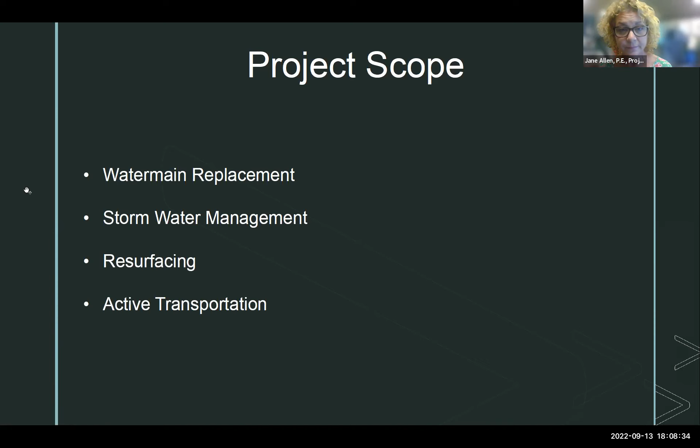So the drinking water infrastructure, the key points on why we would replace this: on Greenview, we're replacing an existing small 6-inch line, and we're giving it a new ductile iron 8-inch line. Along South 7th Street, there is a 12-inch line, but due to the cost of maintenance, past breaks, and the capacity of the interior of the pipe, we are installing a brand new 12-inch ductile iron water main on the other side of the street. We would replace water main either for their age, their size, as I explained for Greenview, the cost of maintenance. If we can maintain a system with less frequency, then it grows in value.

We also have a need for hydrant coverage. In the past, the coverage might have been over 450 feet. New regulations show that it should be under 300. So we have to put hydrants closer together to make sure our fire department has the coverage they need during a fire event. When you replace water main, you also have opportunities for other infrastructure improvements. In this case, stormwater improvements. Next slide.

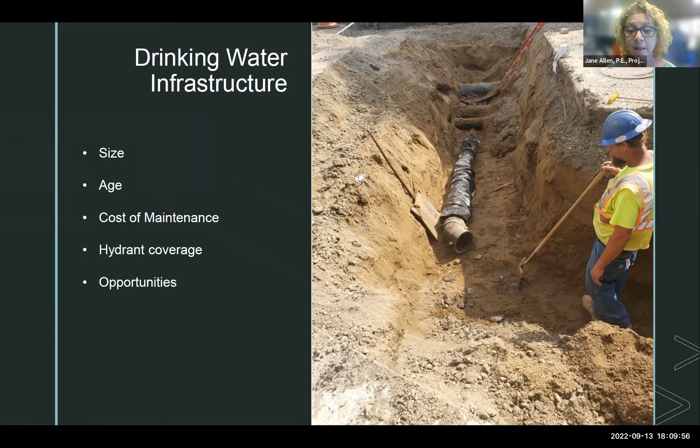So the stormwater infrastructure, the opportunities that are provided by us breaking into the road and having to resurface it anyway are some infiltration trenches. We can place them over the proposed water main and also in place of the abandoned water main, which we will actually take out since it's an existing 12-inch. So we will infiltrate on the first runoff through a sand trench. Then we will retain the water in an aggregate trench that will then discharge to the existing storm sewer when the flow in the storm system has gone down. So it holds the water that is in the roadway and it flushes the first runoff.

We can also, at the time of this project, repair any damaged structures and sewer that we come across. And we can extra capture rainwater also. We are proposing bump outs at proposed new crosswalks. The crosswalks themselves are not a point that we will change in our design. We do want to put the crosswalks at those locations. With the bump outs, not only is it safe for pedestrians and the traveling public, but it also captures rainwater that we can infiltrate into our storm system. Next slide, please.

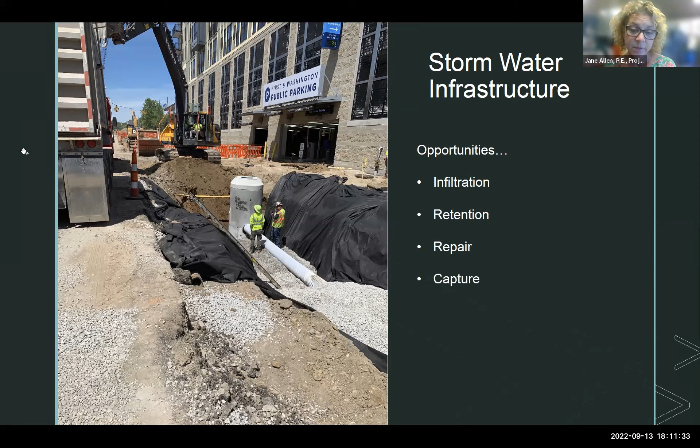The transportation infrastructure, it's how you want to move in your community, how you currently move. We've asked a few questions like that on the survey about how you use it now and how do you want to use it. The active transportation infrastructure that we provide is like for pedestrians, we use sidewalks, the crosswalks, the cross pathways, HMA pathways, the border trail, that sort of thing. And also we want to maintain our bike system.

So South 7th Street was designated an all ages and abilities route. And what you can do with that for the cyclist, Cyrus will explain in more detail. But for the transportation infrastructure, not only is it people walking to the schools or the nature areas and the parks in the area, but they're getting around the neighborhood. They're getting out to Scio Church Road. They're taking mass transit to local businesses. They're getting downtown, and eventually they can get anywhere in Ann Arbor they want to once we improve our infrastructure for active transportation. Next slide.

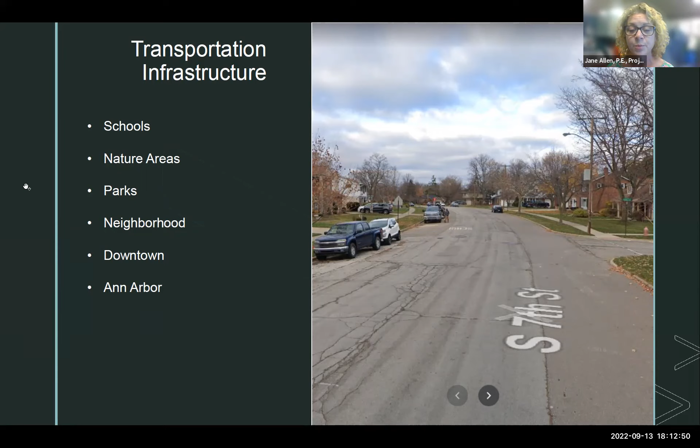As I was stating earlier, this all ages and abilities bike network, that's along South 7th. It's in our transportation plan. It affords for all different range of cyclists, whether they be children, seniors, people of color, women, people with bike sharing group, low income riders, people with disabilities, people moving goods and hardware, or even confident cyclists. It's this wide range of users that we want to have access not only to use the facilities but get to the facilities. So the next slide, Cyrus. We want it to be safe, comfortable, and equitable for all users. Next slide.

You can read more about the All Ages and Abilities Network for the bicycle network in our Ann Arbor Moving Together, which is in the Comprehensive Transportation Plan. And you can find that online. So considering that this is an All Ages and Abilities Network for the bicycle, once we put in the water main, we improve the storm drainage and we resurface the road. What's on top, not changing the location of the curbs other than possible bump outs, is the pavement markings that go down. And they can have streets looking many different ways. So Cyrus is going to go through what you have now and different possibilities of what could be.

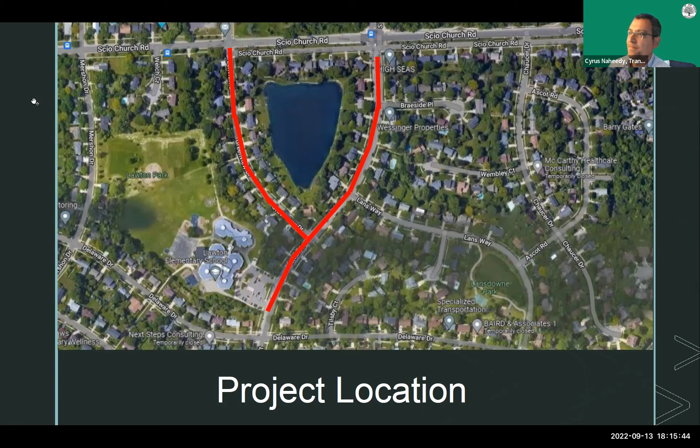So just as a baseline, we put together a cross section of what South 7th looks like right now. So going from left to right across the screen, you have sidewalk, parking lane, and then a southbound travel lane. You can see there's bicyclists and cars together, just meaning that it's mixed. There's no pavement markings to indicate any sort of separation. And then the same thing on the opposite side, a northbound travel lane that's shared, unmarked, and then a curbside parking lane and sidewalk. As has been noted in other project materials, especially the survey, South 7th, especially this section, is relatively wide, which means that there's space for all of this. And the vehicle lanes are relatively wide, given the multiple uses it's serving right now.

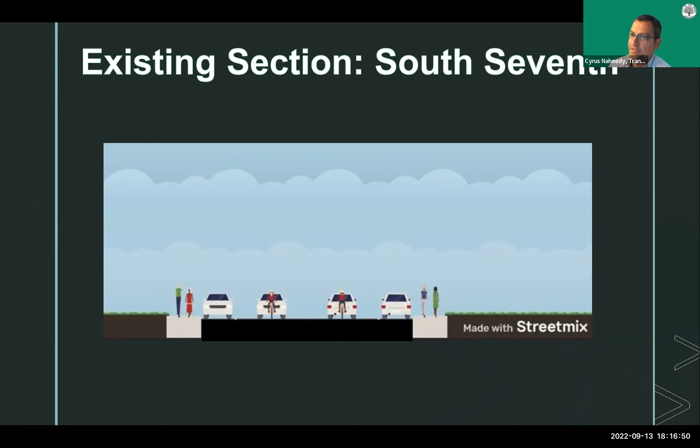So with that as the existing baseline, the first proposed idea is essentially keeping it as it is, but with pavement markings to clarify those uses. So we'd have a parking lane, and then at about 8.5 feet out, we would actually mark where that parking lane ends with these pavement markings. I'm sure you've seen them elsewhere in town. We call them parking tees. It delineates space by space where legal spaces exist, where the parking lane ends or begins.

So then the shared lane is a shared use space with motorists. You can also see the title Sharrow, because that's the terminology for the pavement marking that's on the screen. It shows a bike with arrows indicating a shared space with motorists. So that would be a 12.5-foot lane in each direction that's shared between motorists and bicyclists. And another 8.5-foot parking lane on the northbound side and sidewalk. So again, this would sort of be the baseline. This would be essentially putting things back as they currently are, just with pavement markings to clearly communicate what each part of the road is being used for.

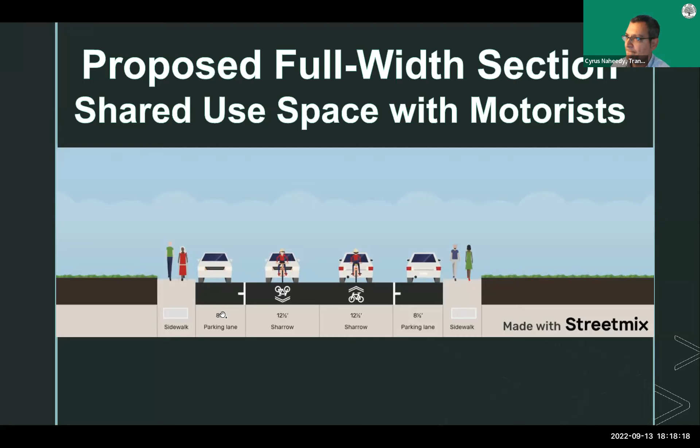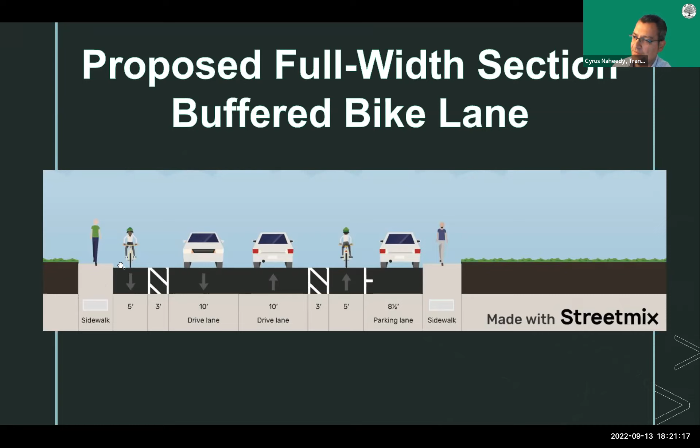So the extra space that would have been used for parking is instead used for the buffer space. And also the parking lane becomes a little bit wider like it was in the existing baseline scenario. For those who are familiar with this, we have this in areas of town. It does create more separation between the bike lanes and vehicle lanes. One thing that's probably worth noting that we haven't talked about yet, that was talked about in the survey, is the changing nature of 7th Street, even in this project area.

So according to the transportation plan, the treatments that we would put on a minor street, like South 7th is further north here and for the northern section of this project area, are a little bit different than what we would put on a local street. On a typical local street, we wouldn't do any pavement markings whatsoever. Because South 7th Street within this project area has both road classifications, part of it's a minor street and part of it's a local street, we're rounding up; at the very least, we'll put pavement markings in, even though that's not something we would typically do for a local street. So our baseline proposal is to put pavement markings in just to clarify the uses, even if it's to clarify the uses as they currently are.

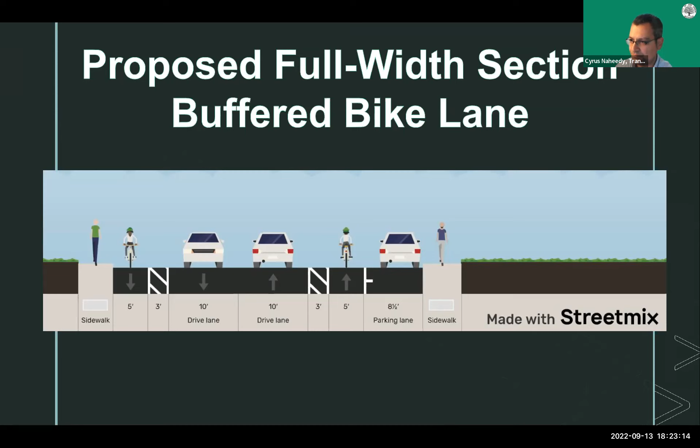I bring that up just because some of these higher levels of treatment are more typical for a minor street or a higher classification street. So a buffered street, or as mentioned in the survey, if we were to put separation in, which is pending some policy and equipment changes we would need to make within the city, those are all related to higher classification roads and higher bike facility treatments.

From a transportation perspective, it increases pedestrian visibility and reduces the crossing distance for anyone crossing. And what's important to note is that when bump outs occur at an intersection like this, while there's not parking legally allowed on this bump out, the way that we typically design our bump outs, and the way that we're designing them at most intersections for this project, it's not taking away any parking that's currently legal at the intersection.

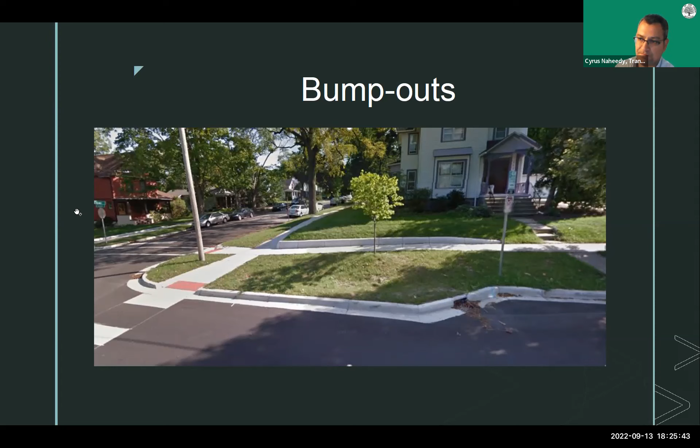Similarly, at 7th and Landsway, it's proposed as a one-sided bump out. Again, which side is not entirely set in stone. We're showing something for conceptual purposes to some extent. But it's a one-sided bump out proposed at each of those locations, which means that there's no impact to parking because, again, these bump outs are occurring at intersections. So there's no real impact to legal parking availability.

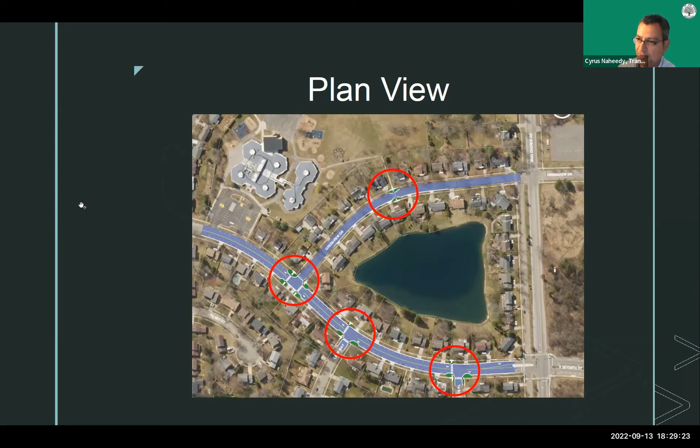So we took that detour to talk about bump outs because the cross sections we talked about for the different proposals look a little bit different at each of the bump outs. For instance, with our first proposal, which is pavement markings clarifying the existing space with shared vehicle lanes each way, at locations with a single bump out, like 7th and Landsway or 7th and Brayside, as you get close to the bump out, there wouldn't be a space for parking on one side. It'd be the wider sidewalk because of the bump out. Meanwhile, the rest of the road footprint is the same: the same width for vehicle lanes in each direction and for the opposite parking lane.

For the next proposal, if we had a single bump out in our designated bike lane scenario, again, the bump out would take one side of parking out for the extent of the bump out. And again, the actual impact on legal parking is really eliminated, because parking at the intersection isn't legally allowed.

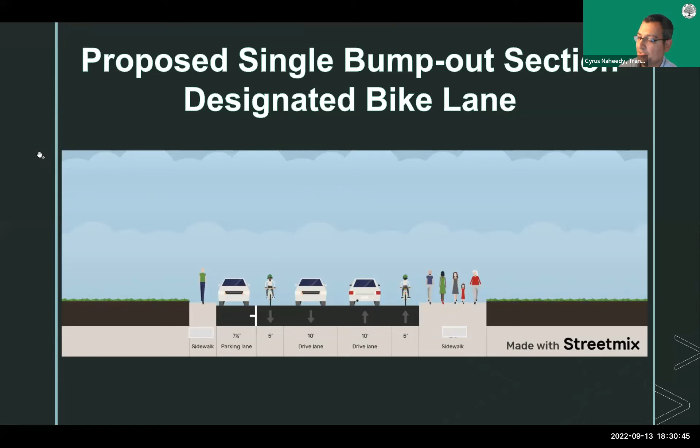And then likewise for the buffered bike lane, because the buffered bike lane scenario only had parking on one side to begin with, that one side of parking would be removed to make way for the bump out. So that means that going through the bump out, the cross section in this scenario would be no parking on either side.

So for those locations like 7th and Greenview, or really just 7th and Greenview, because the only other location where we propose 2 bump outs is along Greenview. And as we noted, none of these cross sections refer to Greenview. So at 7th and Greenview, under the baseline scenario where we have shared use space, as you might expect, it's sort of the next step up that you'd expect common sense wise. Parking was removed on one side for one bump out. Parking is removed on both sides when we have 2 bump outs. So there's space for both vehicle lanes and

shared space for bikes. One concern we've heard in other locations, and this will probably be made clear on the next slide, but there is space for vehicles to be traveling in opposite directions and for bicyclists to also be traveling in opposite directions. So I think that's going to be even clearer here, like for the designated bike lane scenario where we have a separate bike lane, even at our narrowest point where there's 2 bump outs, there's not parking available, but there is still space. The bump out is still wide enough to allow for bikes to travel in each direction and for cars to travel in each direction.

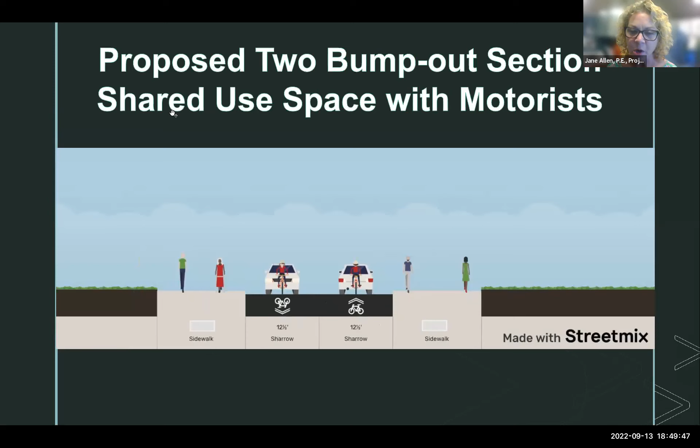So here's a question that maybe is somewhat related. How many feet do the bump outs extend into the road? Without having the plans in front of me, they would be at least as wide as a parking lane. Yeah, we don't have a slide where they're back to back, but in this very first one, if this was just using the same space, marked clearly, there's one parking space removed and all the other parts of the road are the same. So somewhere in that 7-8 feet on each side would be about how much a bump out extends into the road.

That's what all the streets downtown are, 10 feet wide. Currently, even with an 8-foot parking lane, the lanes that are left are 15 feet wide. That would cause a lot of people to speed. So when we put in the pavement markings on this particular cross section, we are narrowing the lanes. Okay.

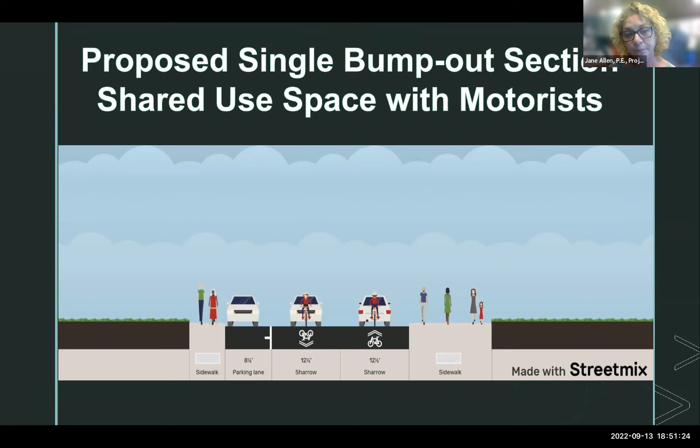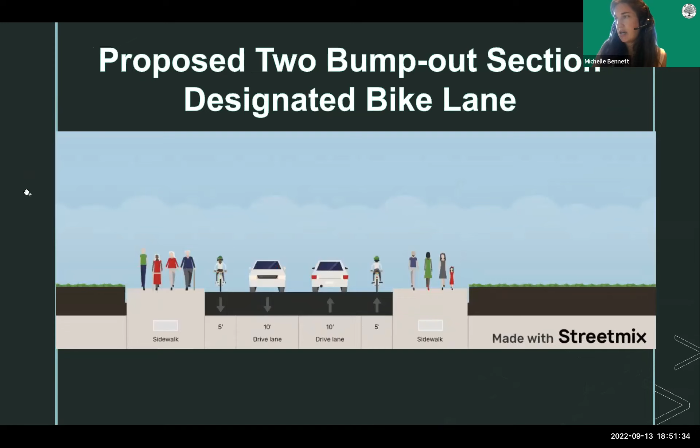The next question we have here is, why is it necessary to completely shut 7th and Delaware during the construction rather than allowing traffic in one direction or another? Jane, you're on mute. Could you repeat that, Michelle? Why is it necessary to completely shut down 7th and Delaware during the construction rather than allowing traffic in one direction or another?

It's only going to be open to local traffic. So there is going to be a detour south. South Church is not going to be constructed until next year, so that's going to be going on at the same time this job is going on. So we're going to have you detoured further east of 7th Street to enter onto South Church Street. That's what the detour is about.

But everyone will have access. It will be local traffic only, so it will be closed to people who don't live on that street. We are going to be keeping Greenview open so you can get to the school for the duration of the school being open. We won't start Greenview until the school's closed for the summer.

Okay, so I think that helps answer this question: when Lawton is letting out, there are long lines of traffic between Delaware and Greenview as parents are waiting to pick up their kids. What impact will the proposed changes have on this traffic congestion?